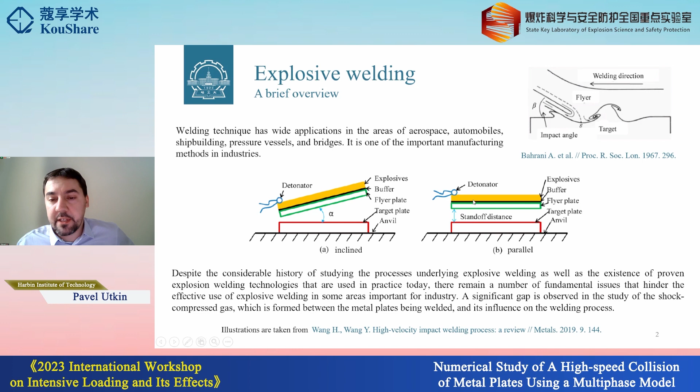For a certain time, it was believed that the gas between the colliding plates could not play any significant role in the formation of the welded joint. But as I said, the number of investigations about this subject is limited, and it turned out that this is not so for industrial production technology for large metals.

Experience with the production of large plates by explosive welding shows that the gas in the welding gap has a controlling effect on the process of formation of the welding joint. For example, it was shown that the replacement of air by some inert gas provides a joint of high quality. However, the role of this shock compressed gas has not been studied sufficiently.

Generally speaking, the shock compressed gas has two effects, both positive and negative. On the one hand, it also cleans and prepares the surface of the plates unless a jet of oxides and contaminants is formed. I mean that this shock compressed gas also provides the cleaning of the surface of the plates that will be welded. On the other hand, the gas moves at hypersonic velocities. Its ionization occurs. It blows metal microparticles away from the surface of the plates, and it can lead also to melting of the metal plates.

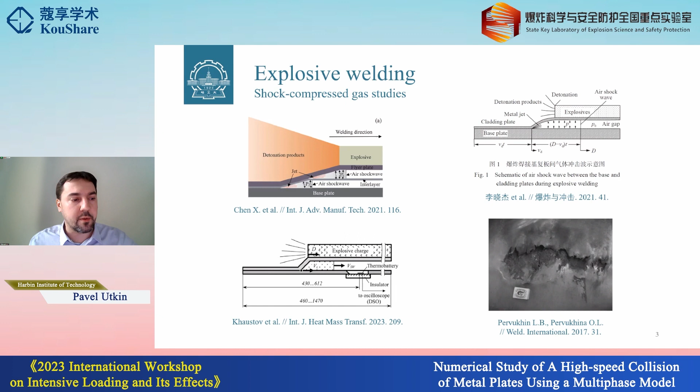The statement of the problem follows the full-scale experiments from this paper of Russian scientist Yakovlev. It was not explosive welding. The conditions were not sufficient for that. However, he considered impact of a lead plate on the steel plate, and the velocities were about several hundred meters per second. He used an inclined scheme of the impact. And after the experiment, he separated the plates and saw crater-like splashes on the surface of the lead plate in the direction of the steel plate. And he tried to explain this phenomenon from the point of view of the development of Rayleigh-Taylor instability on the surface or on the interface of the plates.

And first of all, we considered a one-dimensional statement approximately resembling the full-scale experiments. Of course, the process is not one-dimensional, and I will show the multi-dimensional effects because after the one-dimensional case, we considered the two-dimensional case, that is the inclined impact. And before that, we also carried out three-dimensional pure gas dynamic simulations. We solved Euler equations, but with the stiffened gas equation of state, and we tried to get this instability of the contact surface, crater-like instability. But today I'd like to tell you about this statement and this statement.

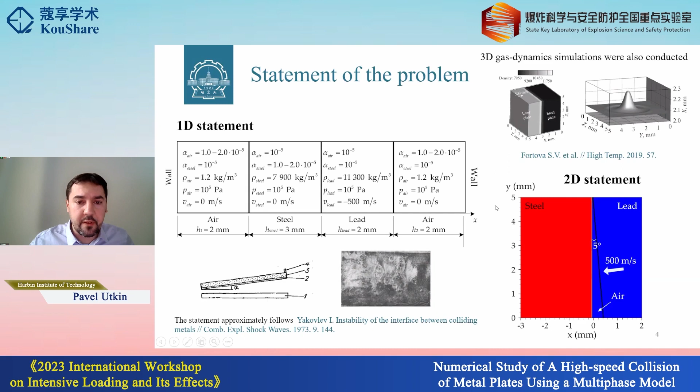The mathematical model is based on so-called Baer-Nunziato-like equations. These equations were derived in the 1980s for the problems of deflagration to detonation transition in heterogeneous explosives. Initially, this model was for two-phase mixtures, that is some sort of solid phase or explosive and a gaseous phase, such as ambient air plus products of combustion of the explosive. But later, this model was developed for many other applications of compressible two- or multi-phase flows.

The great advantage of this model is that this system of equations is hyperbolic. It means that it's possible, of course with many difficulties, to build very robust numerical methods for simulations of problems even with explicit interfacial boundaries. But the main problem is that this system is not conservative. It couldn't be written in the conservative form because of these so-called non-conservative terms that contain derivatives of volume fraction of our phases.

The defining system of equations comprises mass, two momentum equations because it is written for the two-dimensional case, and energy equations for each phase. A stands for air, S for steel, and L for lead. The system should also be supplemented by some equations that provide the entropy inequalities. In the original paper, they proposed to solve an advection equation for the volume fraction of materials. Each phase is considered to be compressible, and generally speaking, each phase has its own density, velocity, and pressure. But there are some relaxation procedures; I will talk about it later.

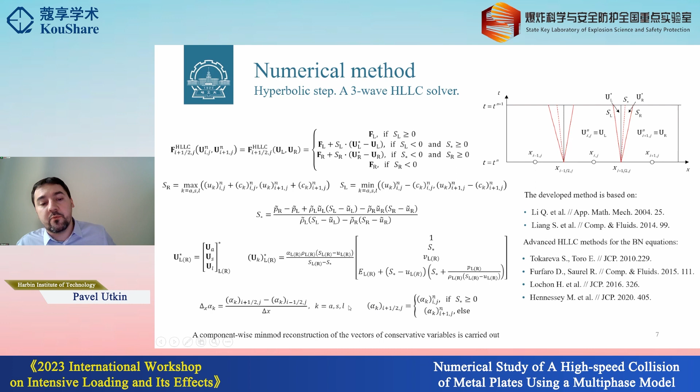If we would like to consider the full Riemann problem for this multi-phase problem, there would be many intermediate states and many waves. It's almost impossible to consider all these intermediate states explicitly. That's why a three-wave solver considers just three waves for all phases: a right wave, a left wave, and a contact wave, and the speeds are defined using all the phases. Then we used an almost common HLLC solver, and this contact speed is also used for the approximation of non-conservative terms, because the properties of the numerical solution depend strongly on the approximation of these terms. So the approximation of these terms should be correlated with the numerical fluxes in use.

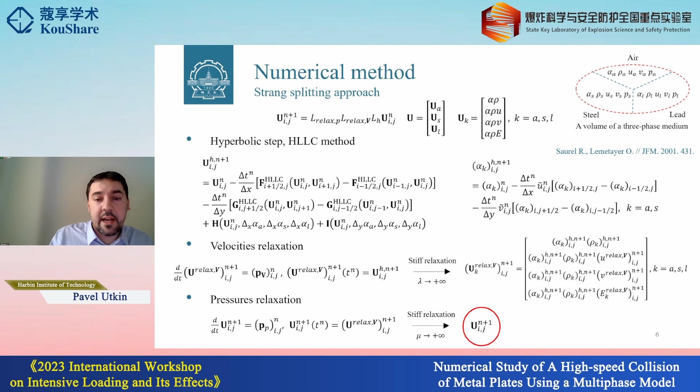I have not much time, but I'd like to say that I have experience in the application of a similar class of models for the simulation of particulate flows with particles, and it's not verification, but just related studies showing that this very similar class of models could be used for simulations of interaction of shocks with a particle layer.

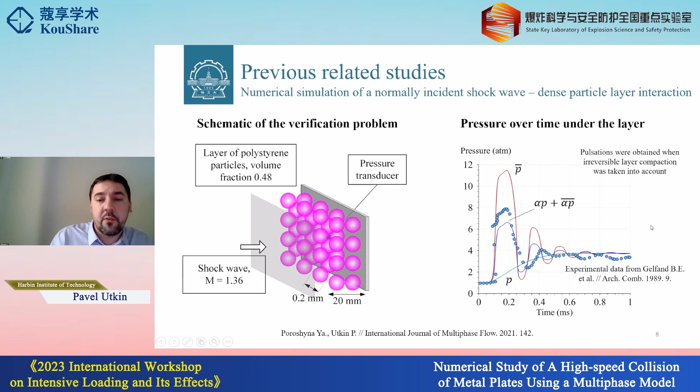So we consider the problem of interaction of a shock wave with a layer of particles on the surface, and we compared our simulations with the experimental data and obtained good agreement, including the oscillating behavior of the pressure curve. And one of our recent papers, it's not about this topic, but the model in use was very close.

We also consider the problem with gas and another very dense media, particles, and the flow was supersonic, and there were explicit boundaries. And the idea was to explain the dynamics of wave propagation inside the layer of particles. And we were able to explain the dynamics of this granular contact wave and transmitted compaction wave when the shock wave propagated ahead of the layer of particles. So just for you to know that a similar class of models can be used for the simulations of dense flows with particles, but closer to our problem.

So I'd like to show you simulation results for the one-dimensional case and two-dimensional case.

So how much time do I have? 10 minutes? 5 minutes? You have 7 minutes. 7 minutes, okay.

So for the one-dimensional case, you can see that initially after an impact, you can see two shock waves. This shock wave that propagates to the free boundary of the steel plate, and the shock wave propagating to the free boundary of the lead plate. Interesting thing that we compared the simulation using the HLLC method with the simulation using the HLL method from this very famous paper. And actually, this is one of the first very robust numerical methods for the solution of such class of problems.

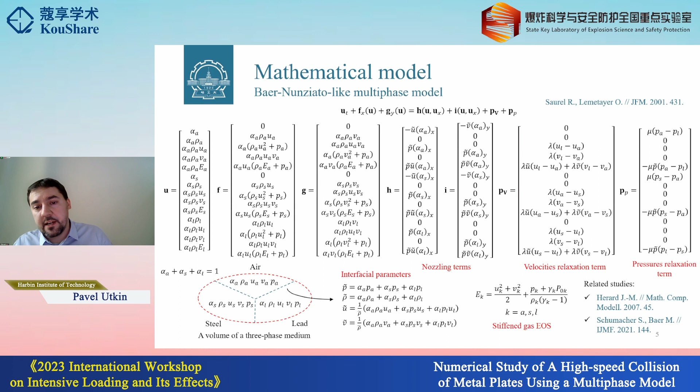And actually, you can see that we use a very simplified stiffened gas equation of state. It's possible to calibrate these constants to get reasonable quantitative parameters in some range that defines our problem. But of course, it's also possible to use the Mie-Grüneisen equation of state inside this Baer-Nunziato model. So that's not a big problem, and we can use a real equation of state.

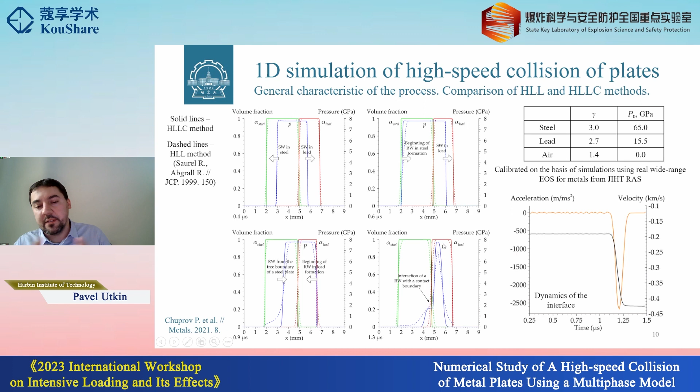And the density gradient is directed quite contrary. So these are the conditions for the formation of Rayleigh-Taylor instability. And so actually, this is indeed a possible mechanism for the formation of splashes on the surfaces of the plates when we separate them after the impact process.

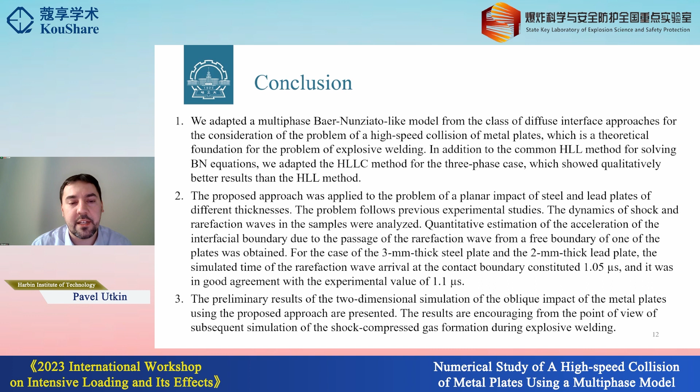Well, I think that I'm almost finished. Yeah, so the main idea is that we try to adapt the multi-phase Baer-Nunziato-like model for the simulation of high-speed collision, and also adapt the known HLLC method for that. And we hope that this model and approach provide us full-scale simulations and study the process of shock formation in the gap between these colliding plates.